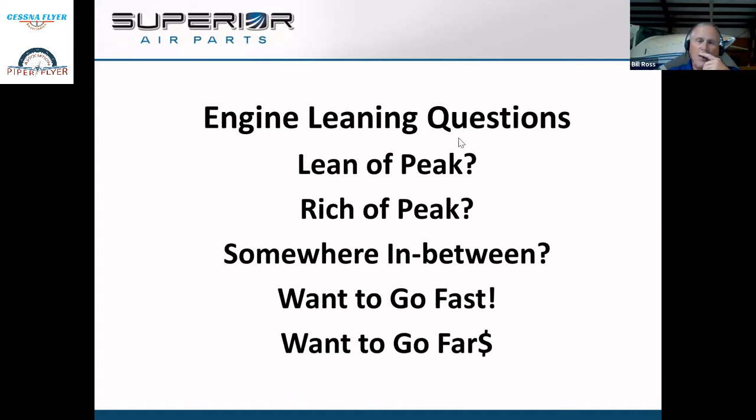We all want to go fast and we all want to go far. Believe me, I know what the cost of avgas is. I hear it from my wife every month about the avgas bill, and I have a set allowance. Sometimes I go over, but I try to keep it within check. But we all want to go fast and we all want to go far, and sometimes we can't have both. What I'd like to do tonight is think about leaning the engine and managing our aircraft engines in a different way. And that is, let's operate them for maximum efficiency and durability.

That's really what the name of the game is, we want to be as efficient as possible and also have the most durability. Isn't that what everybody wants out of their aircraft engine? They want to go from zero since major overhaul to TBO and beyond without any unscheduled maintenance. We want it to sip on fuel, have lots of power, and climb like a homesick angel.

We all desire that out of the aircraft engine. But let's look at operating the engine for maximum efficiency and durability for the long haul.

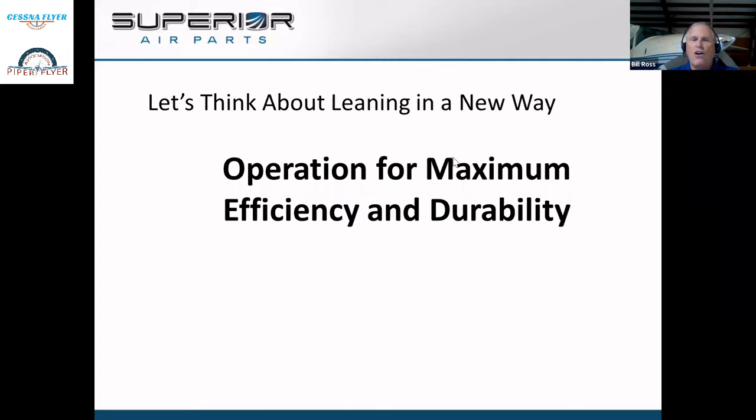If you've attended any of my seminars, and I do work for an engine manufacturer, you'll hear me sound like a broken record about manufacturer recommendations and the importance of following them. But let's think about it just for a minute.

When it comes to engine operation, let's talk about what an engine manufacturer has to do to certify an engine. There are a lot of engineering hurdles to get over, and the federal regulations are written so it's very difficult to get an engine certified. That's why we don't see a lot of the technology we enjoy in our own automobiles, like auto-leaning, timing changes, and injection duration changes from electronic controls, in the aircraft industry. That's simply because of the cost to bring those things to market and get over all those engineering hurdles. But the respective engine manufacturer designed that engine.

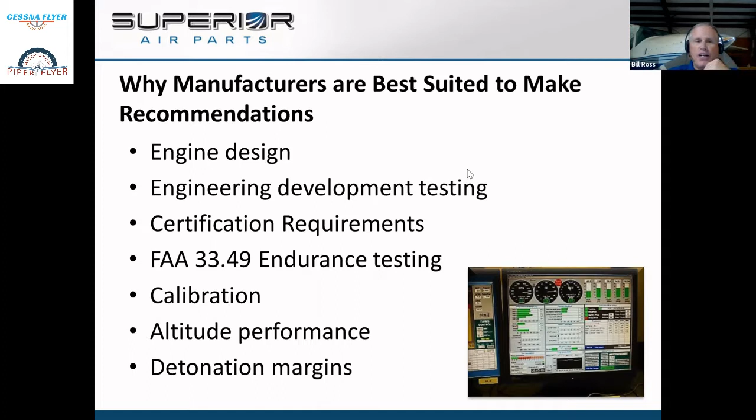Calibration is another big engineering hurdle the OEMs have to get over—altitude, performance, and the big thing we'll talk about tonight when we discuss engine leaning: detonation margins. Detonation margins are required by 33.49, required by the engine manufacturer to keep you free of detonation during the leaning process. Again, if you follow manufacturer's recommendations, you won't and can't detonate the engine even on the hottest of days. But we'll get into that more as we go.

In order to understand engine leaning, I think there are a few terms we must understand. They're fairly basic terms. I included one, the red zone or red fin, because I want to talk about that—I know there's a lot of confusion about what it means. But the big terms are air-fuel ratio and maximum recommended cruise, and I caution you not to confuse this with max continuous power. Those are two different terms, and I'll define each respectively as we go.

Red zone and red fin—we've all read articles about not leaning in this area because if you do, the sky will fall and the world as we know it will end.

And you could detonate. Detonation is the next term we need to understand—what it is and how to recognize it, because you can't hear it like you do in your car. When you're accelerating up a hill and you hear the pinging, that is detonation. That's not the valves clicking or rattling, and not the piston rings clicking or rattling. What you're hearing is a resonance of shock waves propagating through the engine and resonating out—you're hearing it in the form of a ping.

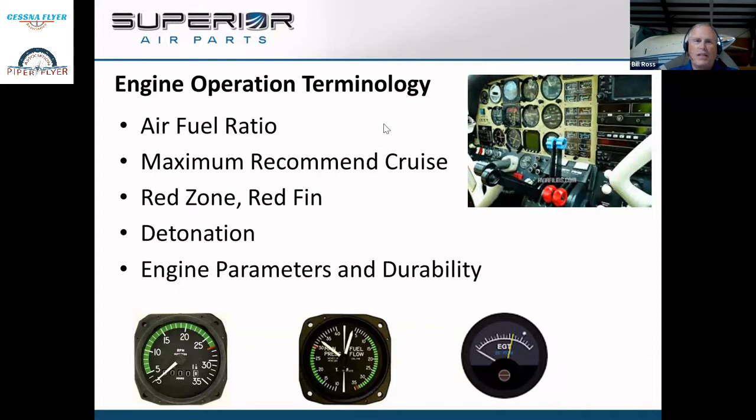We'll talk about engine operation terminology from an air-fuel ratio point of view. An air-fuel ratio is simply the amount of air to the amount of fuel. And the thing to remember is that as we lean the engine, a leaner air-fuel ratio will result in a higher temperature as the mixture is combusted, as the fuel and air are burned.

Most of our engines that we fly produce maximum power just rich of stoichiometric. Now, what is stoichiometric? We have three different concepts here to talk about. A lean mixture, which is 15 parts of air to 1 part fuel, 14.7 to 1, or 14.7 parts of air to 1 part fuel. That's thought to be, or referred to as, a stoichiometric mixture. And what that means is that during the combustion process, all the molecules of air and all the molecules of fuel are consumed within the process. But that's not necessarily the most efficient place for us to run.

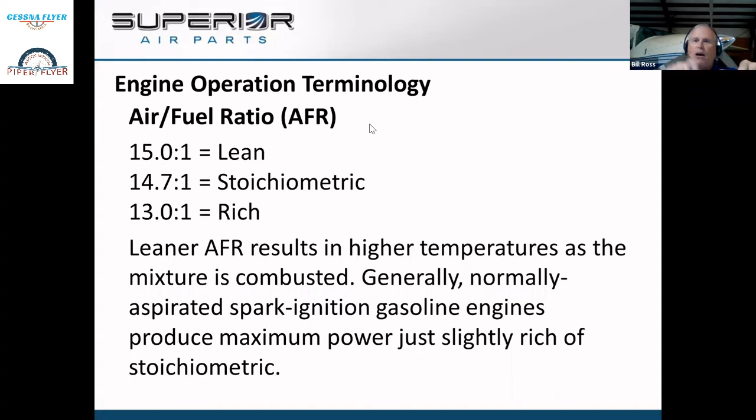And then a rich mixture would be something on the order of 13 parts air to 1 part fuel. So the key here, and when we start looking at the charts at the end, we'll see where peak is and where stoichiometric is. But one thing we need to remember is that our aircraft engines normally produce maximum power, or what you may hear referred to as best power in most of our pilot operating handbooks, slightly rich of stoichiometric. It's not stoichiometric where we find the best power. It's actually slightly rich of that.

Maximum recommended cruise. Remember I cautioned you to be very, very careful on this. This is not maximum continuous power. Maximum continuous power is the power setting that the engine can run at full rich 24/7, 365 days a week, just everything forward, unless some engines may have a 5-minute limit. But that's maximum continuous power. I'm not talking about that tonight.

I'm talking about in our pilot's operating handbook, we will find maximum recommended cruise. This is the point up to, but not exceeding, that manifold pressure or RPM combination where full leaning authority is safe, it's allowable, and the engine is tested for durability, and it's also free of detonation, even if our cylinder head temperatures were at 460 for a Continental or 500 for a Lycoming. We couldn't detonate the engine. So remember, if we're at maximum recommended cruise or below, we can basically do anything we want with that red knob and we can't hurt the engine.

This is where people get into some trouble, is they're leaning and cruising and leaning the engine above what the manufacturer has tested the engine to be safe and durable and free of detonation. And that's where we can get into trouble.

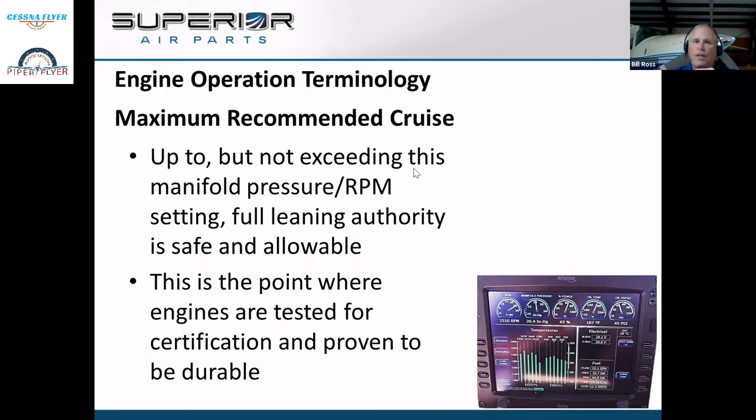Where do I find maximum recommended cruise? In your pilot's operating handbook. Now, a lot of pilot's operating handbooks don't say in the table of contents 'maximum recommended cruise, page 57' and you go to page 57 and it says 25 inches of manifold pressure, 2,500 RPM. Some do, or some may say max cruise power is 65% or 75% or 85%, depending upon your respective engine and your respective airframe. But when we look in there, if it's not defined as such, we look at the power charts.

And in those power charts, you will see at 2,000, 3,000, 4,000, 5,000, pick a number, different altitudes, manifold pressure and RPM combinations, expected fuel flow, and percent power. When the chart ends at the top, that's maximum recommended cruise power. Usually in a 182 it's somewhere around 72 to 74%, depending upon the altitude. But that's defined in the chart, the cruise power chart for that particular airplane. You have to consult your aircraft to find exactly what your maximum recommended cruise is.

If you're flying an experimental aircraft, then you don't have the luxury of flight-tested data by an engineer who has established that. You have to refer back to your engine data and do some flight testing on your own to find where you should operate the engine.

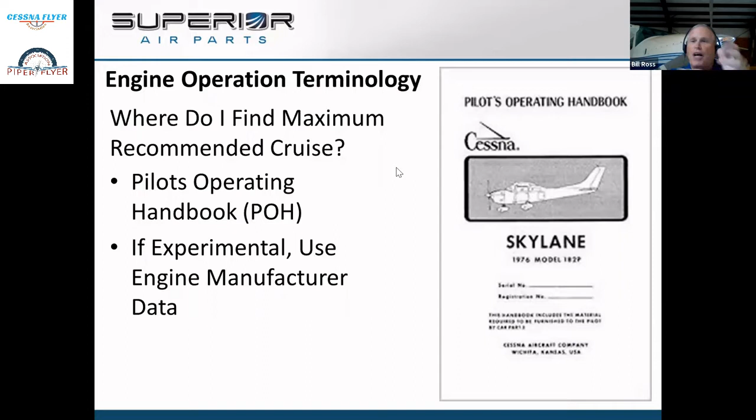We've all talked about the red zone, red fin. We've read all the articles out there about there being a red fin and a red zone during leaning. But the thing we need to remember tonight is that if we're operating at or below that max cruise power setting set forth in our pilot's operating handbook, there is no red zone.

Because you can do anything you want with the mixture and you can't hurt the engine. In fact, Continental publishes a bulletin that says in any Continental engine, at or below 65% power, you can run the engine at peak if you'd like. There may be cases you want to do that, such as a flight school having trouble with lead or combustion deposits. That's why it's not one single religion as to where to run the aircraft engine.

But the thing we need to remember about the red zone is that at or below max cruise power setting, there is no red zone. You have full leaning authority of the engine, and you can't hurt it by leaning. If you're above that setting, if wide open in a turbocharged engine...

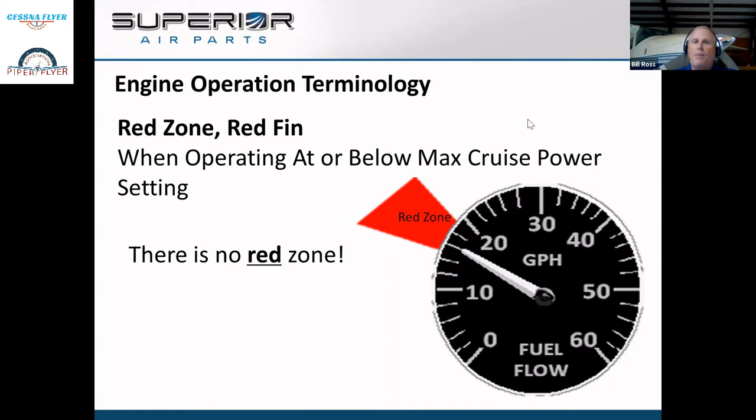I know the manual says don't lean above 30.5 inches, but I think it'd do better at 34 inches. No, that's where you get into trouble. That's where the engine's not tested. So be very, very careful. Make sure you review your pilot's operating handbook or engine manual to establish the maximum cruise power setting for your respective aircraft.

And what we're trying to avoid is detonation. Remember, I said you can't hear detonation. It is a very, very detrimental phenomena that can occur in an aircraft engine.

Detonation is an explosion happening in our engine, not a controlled burn. When we talk about the 4 cycles of an engine - intake, compression, power, and exhaust - a lot of folks visualize the intake valve opening, drawing in a fuel air mixture, we compress the gas, the spark ignites, bang, and it blows the piston down. That's not really what happens.

It's more of a controlled burn. It's a lighting of the fuel air mixture. That fuel air mixture expands and gives a nice push on the piston that we understand as horsepower. Detonation is when the piston comes up and there's a spontaneous explosion that happens very, very rapidly. All of the heat is contained within the combustion chamber - the flame front doesn't have time to propagate down through the tailpipe.

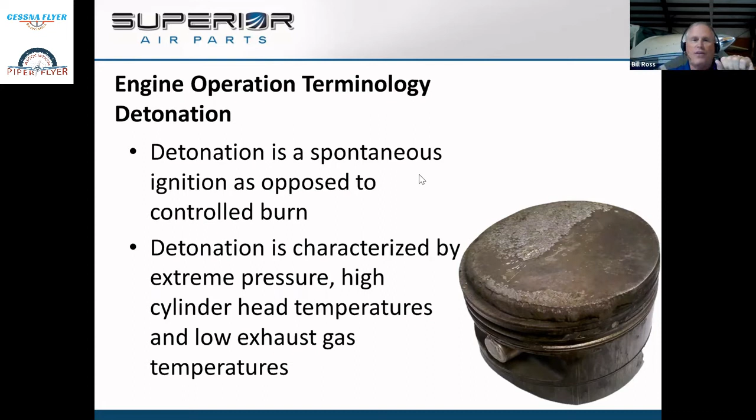Here's an illustration of normal combustion and the push as illustrated. It's probably a better explanation than I did in the previous slide. The explosion in detonation on the right side is a hammering of the piston.

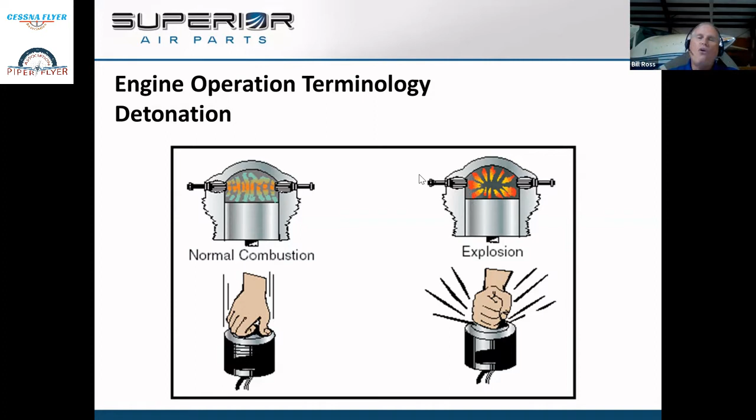Very serious event. If your engine does have a detonation event, it's not a time to just change the cylinder and piston and go on. It's very, very important that the engine be disassembled completely and inspected for damage caused by detonation. It can crack crankshafts, it can bust connecting rods, it can bust connecting rod bearings, it can extrude them. There's a whole lot of things that can go on as a result of detonation.

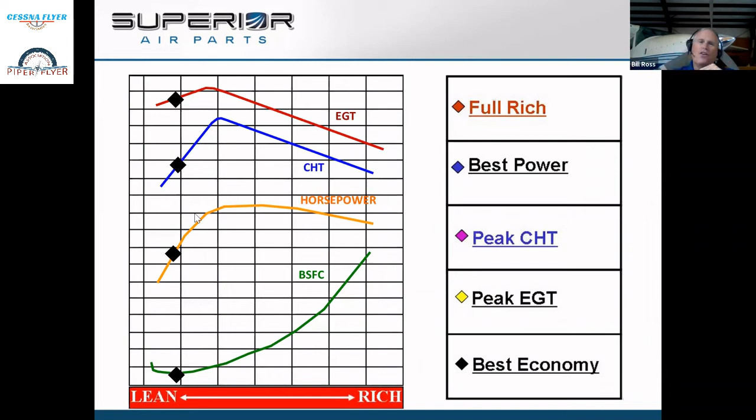This is what's happening in a lot of engines I see today. A lot of operators, I fly with many pilots, and I see this all the time. They disregard what the manufacturer says and lean further. My exhaust gas temperatures go down, my cylinder head temperatures go down, because I read that article that 380 is bad, so I'm going to lean it further and cool it off.

Look what happens to cylinder head temperatures - it cools dramatically, and horsepower falls off. The more we twist that red knob in the lean mode past peak, the more we reduce horsepower. Look what happens to our brake-specific fuel consumption curve - it starts to go almost straight up because we're now grossly becoming inefficient. Along the way, we've lost efficiency, and we've also caused problems with cylinder head temperature, which is vital to engine cooling.

Efficiency goes out the window. Oil temperature starts to tail off because cylinder head temperature is so cool. Oh, but I read this article that 380 is bad, so I've been targeting about 340 because I want to be good to my engine. Well, at 340 degrees cylinder head temperature, you may not be getting 180 degrees oil temperature. Guess what that can do? Lead to corrosive attack in the engine.

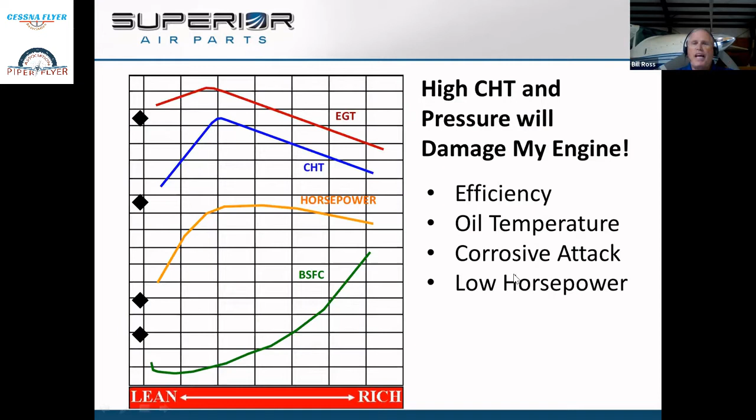We've seen more over the last probably 10 years, with the rising cost of aviation fuel, maybe almost 20 years now, more corrosive attack to the cam and lifter interface, spalled lifters, than we ever had before. I feel a lot of that is due to too low an oil temperature, which leads to corrosive attack and low horsepower. It can even lead to engine roughness.

I've seen pilots so compelled to keep cylinder heads cool that they're actually running in an area where the engine is running rough, and that can be detrimental to piston rings, the piston, and ring cavitation, and things like that all along the way.

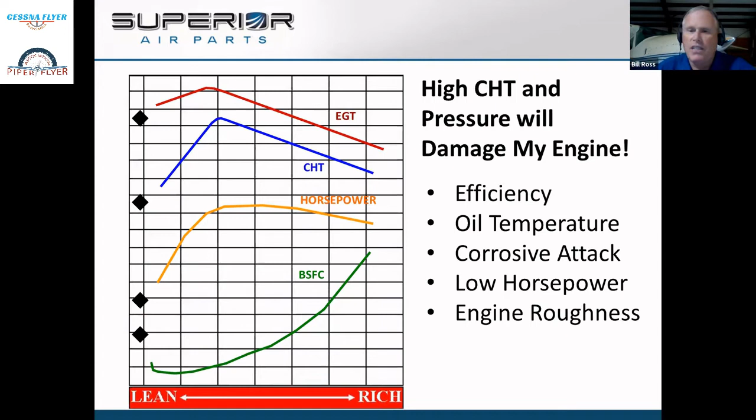What happens in the industry now, I think, is guys are sitting on a park bench, and one talks about an article he read that 380 is the place to be. And another guy says, well, if 380 is good, 350 must be better. We all think that way. And if 350 is good, then 300 must be the target for my engine. That's not the case, and be very careful thinking like that, because you can do irreparable damage to your engine by being too kind to it.

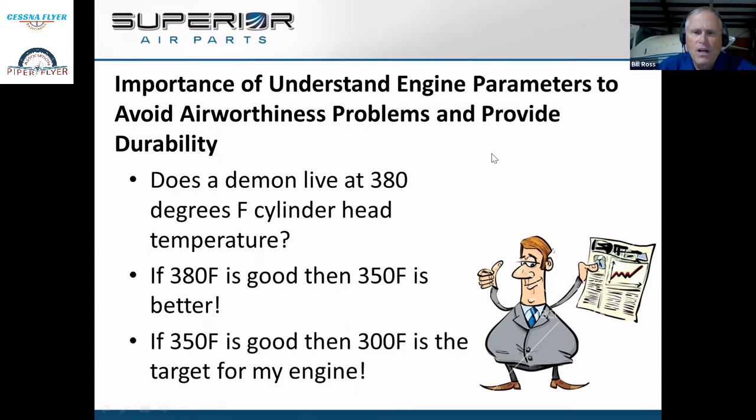So we want to be very careful about our oil temperature and things like that.

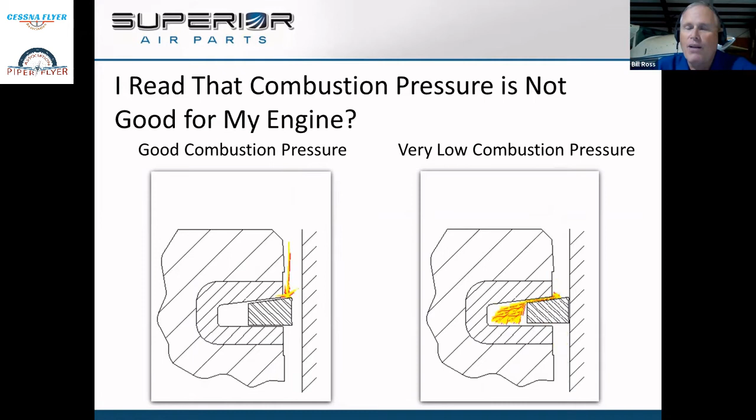I know a lot of people think, well, I'm running lean of peak and aggressively lean of peak, so there's no way I'm loading my engine up. But yes, if you set up a scenario like this, you're loading the engine, and the oil is becoming laden with combustion byproduct because it's escaping around the ring. So be very, very cautious and careful about that.

Owners and operators should look at manufacturer's recommendations for how to operate the aircraft and what maintenance should be performed. If you hear hangar chat or suggestions on how to operate your engine that aren't in concert with your respective manufacturer, question that validity, and consult your engine manufacturer. We field calls on leaning and operation all the time. Following the right guidance will only lead to safety, reducing the cost of owning the engine over time, and improved reliability.